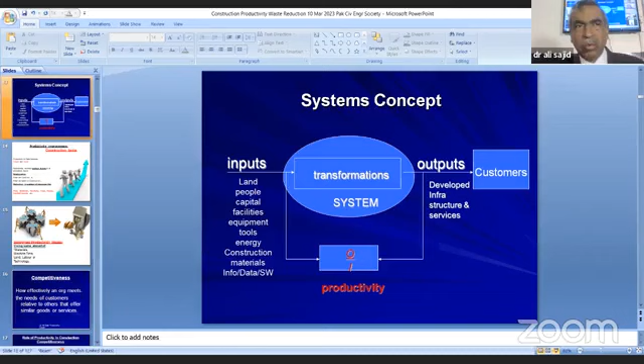The more efficient we are, the more productive we are. In countries like Pakistan or other developing nations, there is some confusion between the words productivity, efficiency, effectiveness, efficacy, capability, and production. These are six definitions which are used interchangeably even by qualified engineers, so allow me to explain them one by one in a few minutes.

Our core issue today is productivity improvement in the construction sector. As we know, productivity is a ratio between output and input with due regard to quality. If we reduce the wastage of resources like man, material, machine, time, space, capital, money, and information and data collection, then we are more efficient, and so we are more productive. Efficiency leads to productivity, effectiveness leads to productivity, and effectiveness in combination with efficiency gives you a powerful combination called productivity.

Production is the quantity of physical things being produced, I repeat, production is the quantity of physical things being produced. Productivity is a ratio of output to input, that is the product or the infrastructure we are going to carry out in construction, divided by the input given to it. Input is also design, planning, time, resources, information, data, seismic data, geotechnical data, cement, and concrete, that is input.

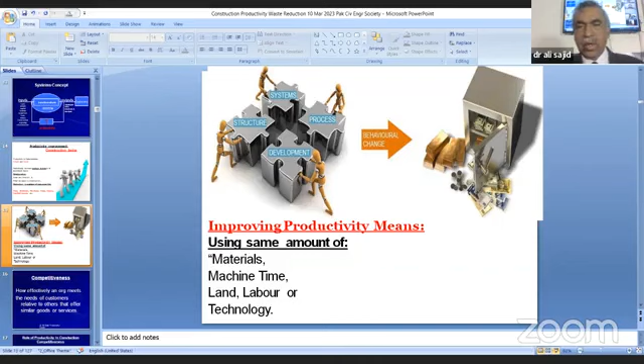So when we talk about improving productivity, it means using the same amount of material, machine, time, labor, land, and technology for producing output. This is another definition of productivity. Our construction industry is the least competitive in the globe. I have some data from India, and I have reason to believe the data in India is very close to the data in Pakistan's construction sector.

In Pakistan, I could not find any reliable data or any reliable study, and I would request through the courtesy of this forum to start conducting some study on construction productivity from today onwards, so as to get a fair idea of the pricing.

I recall one statement of a French marine specialist who came to Pakistan in the 1990s to build a submarine in Karachi for Pakistan. They told that in Pakistan we will take 3 years to assemble one submarine, which we take 1 year in France. The reason he gave was that Pakistani labor is sluggish, slow, least interested, least efficient, and least effective, and they waste a lot of time. So your productivity is 1/3 of the productivity of Europe. That was his claim. So you can well imagine the overall productivity of South Asia.

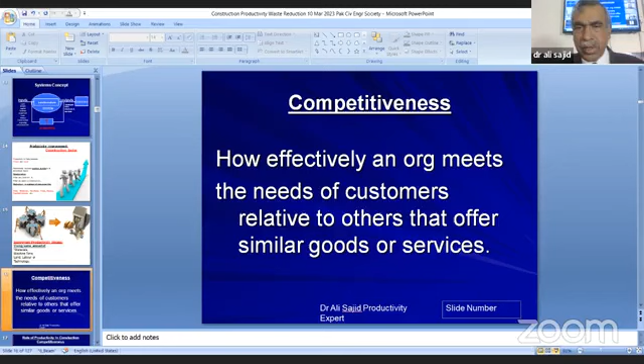Due to the culture of slavery over the last 5,000 years, speed, spark and dynamism is missing in our labor, thereby giving them lower labor productivity. So we are least competitive because our labor productivity is very low. Competitiveness by definition is nothing but the capacity of some entity to outperform another entity. That is the definition of competitiveness.

In the Global Competitiveness Index made by the Davos World Economic Forum, Pakistan is around 110, 120, 130, 2 to 5 points up and down, but below 100. And India is, I believe, 71 and so forth. So India is 30 to 40 points ahead of Pakistan in competitiveness, and productivity is the main contributory factor towards competitiveness.

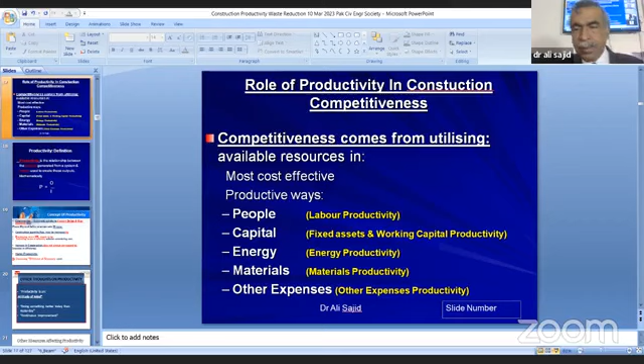So competitiveness comes from a couple of things. First of them is people, that is labor productivity. Capital, that is fixed asset plus working capital productivity. Energy, that is fuel you consume in your construction machinery, electricity, and various other energy resources like solar, etc. Then material productivity; we will be explaining them in a minute in detail.

So construction is a systematic activity to convert design and raw material into finished physical infrastructure with high value in the form of a project. Here, construction quantity numbers may be increased by a couple of things: more engagement of employees, more input by installing more machinery without considering costs.

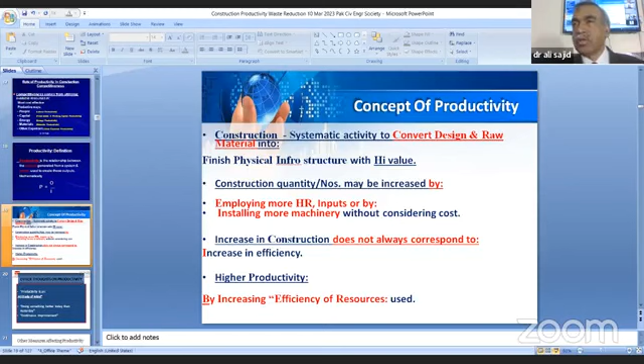So we derive the third definition, of efficiency. Efficiency is efficient utilization of input. With less labor, you produce more, that is efficiency. With less fuel, you work more, that is the efficiency of a machine. So in productivity, we use the word efficiency for the conservation of resources, that is input.

Now, we have one big claim that productivity is not only a ratio, productivity is a state of mind. It is attitude, it is your mindset. Productivity is a logical outcome of your keenness to deliver something in a speedy and effective manner. So I defined efficiency. The fourth definition now comes to effectiveness. Effectiveness is achievement of the end objective with maximum possible percentage. In Urdu, we call it Mosirpan.

So effectiveness and efficiency, when you combine both, lead to productivity. If I'm efficient, I work at a very good speed, but the final results are not coming, so I'm not effective. So efficiency in the absence of effectiveness is a useless phenomenon, we conclude. So attitude of mind says doing something better than yesterday. It is continuous improvement.

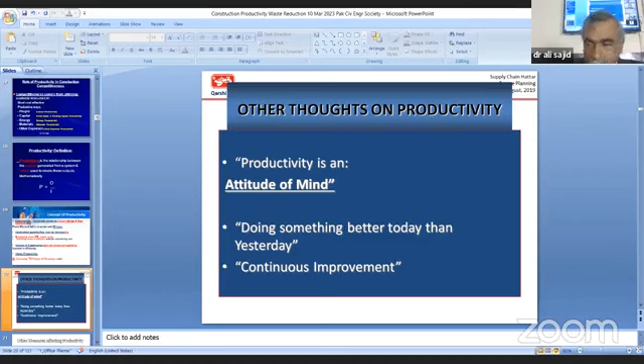So we have defined efficiency and effectiveness, and I can give you one example from my own life. I was called by a consultant in New York 15 years ago, and he asked me to come and give them 2 weeks for a project feasibility preparation in New York. I said, okay, I can come. He asked me to come within a couple of days. When I saw the passport, the visa was valid but the passport had expired. So on an urgent basis, in 24 hours, by paying maybe 100% extra money, I got a new passport. So I was efficient, because I got a passport in 1 day.

When I went to the US Embassy for stamping the visa, they said the spelling of my name was wrong. Instead of Ali Sajid, there was a typographical mistake: Ali Sajjad was printed. They asked me to bring a new passport so that they could stamp it. I was efficient but not effective. When I went back, there were some vacations by the government of Pakistan. There were some vacations by the US government.

So it took me 1 week to get the visa, and the project deadline was expired. So I was not effective. I could not reach the US in time. So efficiency in the absence of effectiveness is a useless phenomenon.

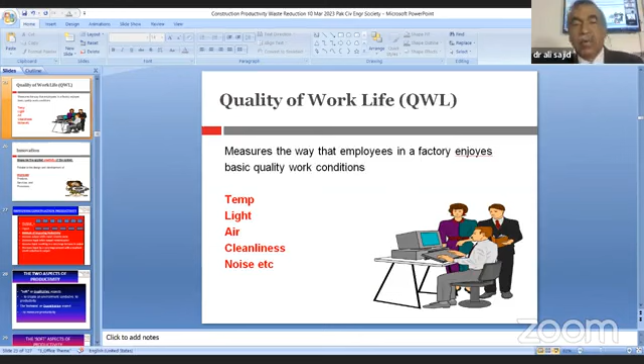This is a very important thing, which is again missing in some of our construction agencies or construction companies in Pakistan. Innovation is the fifth element, which is a logical input, or a natural input, for enhancement of productivity of construction. The element of innovation is rarely incorporated or tested or experimented in Pakistani construction,

except a few bigger companies, Habib Rafiq, and big companies in Islamabad, Lahore, and Karachi, where they use innovative techniques to enhance operational productivity of construction. The element of innovation is missing across the board in construction. So more incorporation of innovation gives rise to speed, convenience, ease of doing business, and low operational or construction cost. So these four are the logical outcome of innovation.

Try to carry out innovation or incorporate innovation in each process or sub-process of your construction system. So you need to have improved products, projects, services, and construction processes. And innovation increases the rate of construction processes manifold. I repeat my statement. Innovation increases the rate of construction processes manifold.

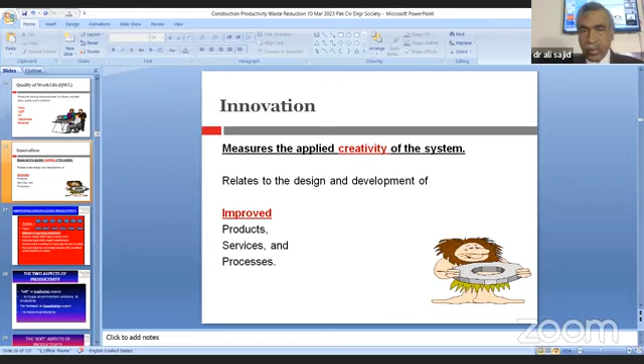Now, how to improve construction productivity? As we agreed earlier, output to input ratio is called productivity. So you can improve construction productivity by 3 or 4 means: increasing output while input remains the same, number of labor and machinery the same, but the speed of construction increases, so you improve the productivity. That is the first thing.

The second thing could be you decrease the input while output remains the same. Instead of 10 labors, you reduce to 8, and the number of finished rooms remains the same. So that is the second way of increasing construction productivity.

The third is increasing input, resulting in a very large increase in output. You go from 10 to 12, and instead of 3 rooms per week, you are making 5 rooms per week. So a substantial increase in output as opposed to a minimal increase in input. So a disproportionate increase in output relative to the increase in input also enhances construction productivity.

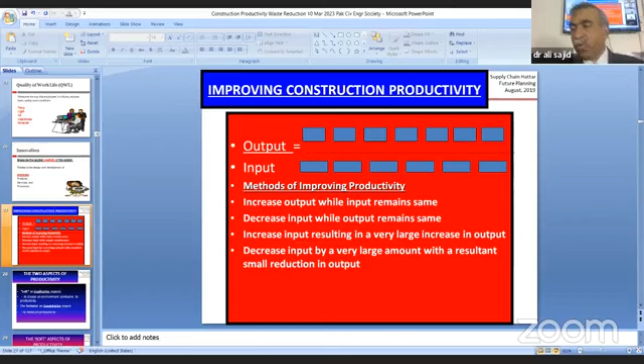And the fourth is decrease input by a very large amount. So instead of 10 labors, you decrease it to 3, and the number of constructed rooms, which were initially 3 rooms per week, now comes to 2 rooms per week, not 1 room. So that is a disproportionate decrease with a large decrease in the number of labor. So these are the 4 generic ways you can improve construction productivity.

There are 2 aspects of productivity in construction. The first is the soft or qualitative aspect. In the soft, we create an environment conducive to productivity. You try to incorporate elements of motivation, encouragement, himmat, umeed, hope, positive talk and positive communication, and elements of increasing morale should be incorporated there. That is the soft issue.

That comes from your level of leadership. That is your caliber, your thought process, exposure and education, which creates the quality culture. That is the soft aspect. And the second is the technical, quantitative aspect, to measure productivity. Productivity measurement is again one thing missing in the Pakistani construction scenario.

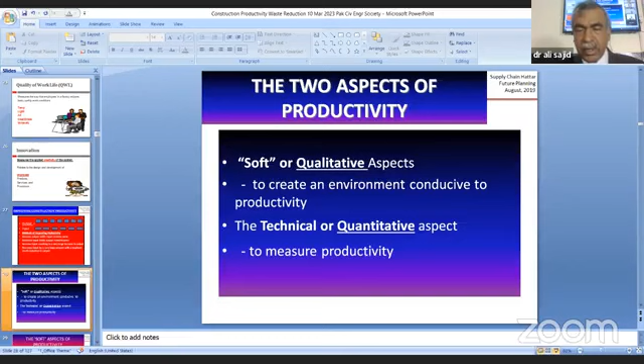And I would like to request Tahir Sultan Sahab, who is running a construction company, to consider starting to measure productivity in every process, starting from cement and concrete to formwork and bridges. Try to measure productivity of machine, labor, material, and we will try to explain in a few minutes.

The soft aspect of productivity entails productivity culture, teamwork, interdepartmental communication, level of motivation, quality of working environment, delighting the internal customer, that is your employee, work and business ethics, fairness in your public dealing, integrity of the boss, caring for the workforce, looking after their sensitivity and their self-respect, and quality of working life. These are the soft aspects of productivity, and these are also not very common in practice in

Pakistani construction companies. So my humble submission is to work on one topic on a weekly or monthly basis, and within 6 or 7 months you would be able to address the soft aspect of productivity. This is a special request to Tahir Sultan Sahab to register my points. I have seen construction companies in Washington, D.C., where I stayed for 8 years, and 1 year in Calgary and Toronto, and I have witnessed myself the quality culture, productivity culture, and construction culture of the construction companies.

We have one argument that our workforce is illiterate, dodgers and cheaters. Yet I know some companies in Pakistan that take extraordinary steps to create productivity culture. So productivity is not a ratio, it is the name of a culture, which is a logical outcome of the thought process of the big boss. So measures of productivity: partial productivity is output divided by labor, that is labor productivity. Output divided by machine is called machine productivity. Output divided by capital, capital means money or investment, the cash you spend.

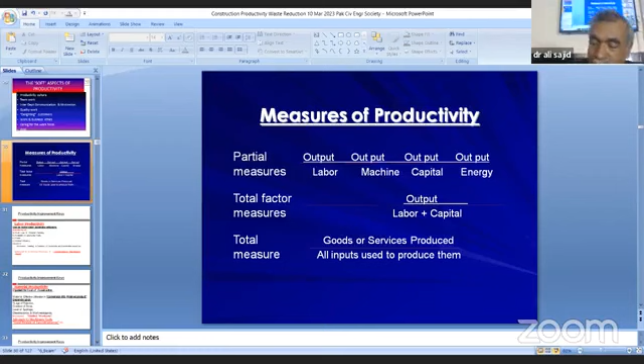So the first submission to this honorable forum is to start measuring productivity, and I can volunteer 1 or 2 days a month to any company to start measuring productivity. And I am going to give you some formulas for that. First of all, labor productivity can be higher or lower depending on a couple of factors. Availability of workload: if you don't have work, they're sitting idle, adding to negative cash flow; they are doing nothing but being paid. So reduction of workload also leads to low productivity.

Then material handling capacity of the worker and the machinery also affects labor productivity. Availability of power, that is gas, electricity, and internet is also power, and availability of software is also power. And worker efficiency, the speed of doing work, also leads to worker productivity and effectiveness. He may be efficient but not effective: he's doing the work, but at the end of the day the work is garbage. So that is non-productive again.

So worker efficiency also needs to be considered: his effectiveness, his efficacy, his capability, his willingness to work, and his motivation to work. Worker efficiency depends on his level of training, motivation, and working conditions, comfortable or poor; temperature control, humidity control, noise control all lead to worker efficiency. For the same reason, multinationals have special SOPs for worker convenience, safety and comfort, so as to add value through efficiency in the worker's mind.

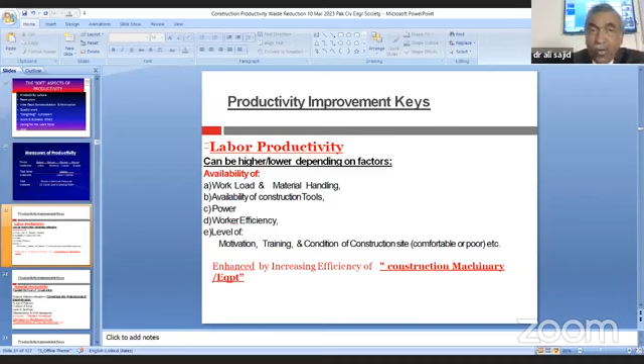Next is material productivity. In South Asia, material is becoming more important because in the last 3 or 4 months, I recall in the paper I have read, the cost of steel rose about 50 to 60%, maybe 100% in the last quarter, thereby adding extra money to the construction cost. So material productivity has a major significant role in the overall productivity of construction. So we need to find the ways and means to conserve material and avoid its wastage. Material saved is material generated, and money saved is money produced.

So material conservation depends upon percentage of rejection, creation of scrap, more waste, level of spoilage. In ordinary home construction, as a Pakistani ordinary citizen, I have observed the mason break 2 or 3 tiles and throw them out as construction waste. In 50 to 60 tiles, he uses his manual thoda, desi. He spoils 3 to 4 tiles or bricks, average of 50. So that is also waste. It costs 2 to 3 or 4% of waste.

Obsolescence and work waste, obsolete methods of construction and work waste, which I will explain at the end of the 2-hour session. The ILO, International Labour Organization, also carried out some work. I don't have time, but I will show only one slide as part of that. And I carry out one-day exercises in Sialkot and Faisalabad, in the surgical industry, footwear industry, auto industry, etc., where I give them exposure on how to save time.

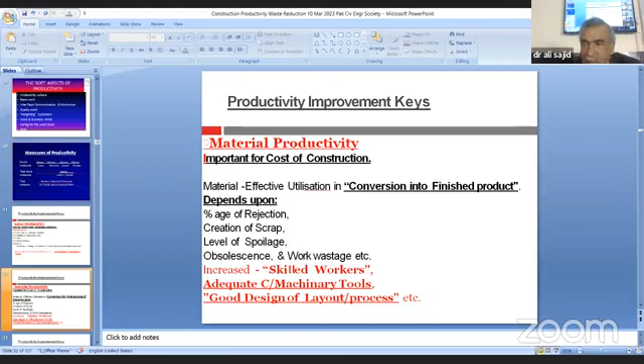So obsolescence of the work method is one thing, work wastage is the second thing, which is increased by the absence of skilled workers, adequate construction machinery, tools, etc. So incorporation of good design, layout of processes, and simplified construction processes as opposed to complicated ones plays a vital role in saving your time, resources, rework, scrap, and waste. Waste of time is also waste of money because time is money. I repeat, time is money.

Machinery productivity depends on a couple of things. First of all, availability of raw material. Raw material hoga to machinery kaam karegi. And availability of power and skilled manpower. The big bulldozers of Japanese and American companies, its worker requires 6 to 8 months, in certain cases 1 year training to be able to handle professionally, carefully, and avoiding the damages.

I recall 3 years ago, a couple of Hajis were found dead because of misuse of construction machinery in Khana Kaaba. So absence of skilled labor in construction machinery is counterproductive to the machinery use as well. That is unskilled worker. And machinery location also plays a vital role, and distance from the site also plays a vital role. So in every sentence, in every bullet, you will find one tip for your construction improvement in productivity. These are the well thought out words.

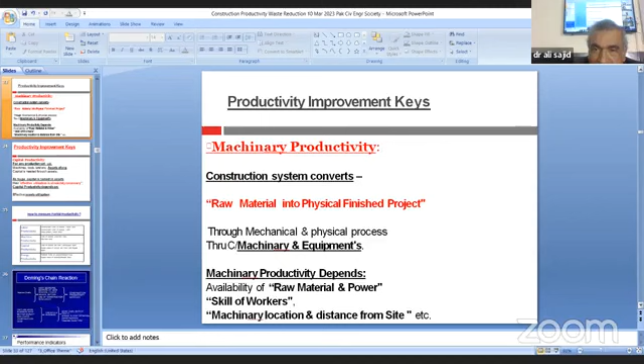And I'm giving you all slides through the courtesy of our gentleman, Dr. Engineer Tahir Sultan Saab, who is taking a lot of pain just for the sake of promotion of this

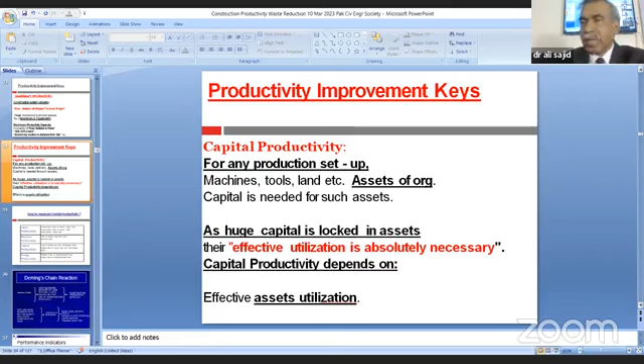Now, next question arises: how to calculate partial productivity in construction business? Unless we are able to understand the calculation processes, we are not able to improve, modify, change, innovate, or amend. So for improvement, you need to be able to understand whether you are overweight or underweight. And measurement is an essential tool to help you. You are overbooked, underbooked, or least booked.

So labor productivity, what are the units? Constructed units of output per labor hour. That is the first unit. Then constructed units of output per shift of 8 hours or maybe 9 hours. And then value added per labor hour. He tried to do something, but at the end of the day, the things were wrong and labor was not adding any value in the system. So the third performance indicator of labor productivity is labor value added per labor hour, or maybe per labor shift of 8 hours per day.

Second is machine productivity, that is construction machinery productivity, that is units of output per machine hour. And third is capital productivity, units of output per 1 lakh rupees of input. You spend 1 lakh rupees or maybe 1 million rupees in a big project, and what is the output arising from that investment you made on daily basis. So if lakh is a big amount, you may use a unit of 50,000, maybe 10,000, but that should remain consistent throughout for all calculations.

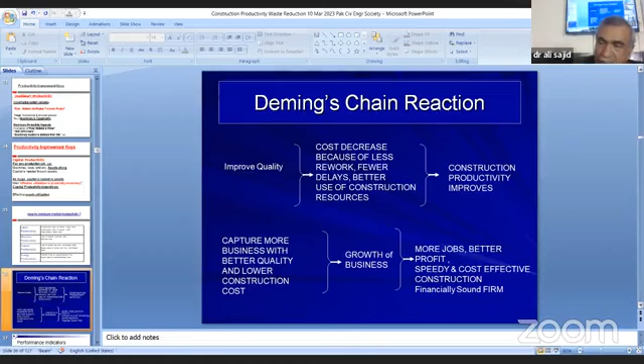In order to absorb the higher side of cement and construction material cost, that is steel, you can overcome the extra cost by reducing your waste, scrap, rework, and rejections. These are 4 or 5 things, and I'm going to explain the famous eight construction wastes, which are known across the board, across the globe.

Before that, this is the second part I'm going to explain, that is performance indicators. Now, in order to calculate productivity, you need to devise, design, and define certain level of performance indicators. These are the benchmarks we use in the construction industry, and they are based on key performance indicators. A key performance indicator provides you a basis to measure the performance of various steps, human beings, machines, or materials. Many KPIs in construction industries measure job performance.

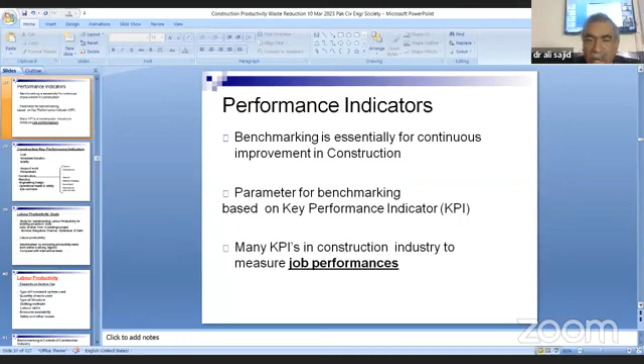Now, these are the construction key performance indicators in front of you. First is cost, then scheduled duration - 5 years, 2 months, 3 months. The quality standard is the third KPI. The fourth KPI is the scope of work, what is included and what is not included in the project. Then procurement - delay in procurement also gives a negative dent to productivity. And then construction, the main activity itself. In construction, we have 4 or 5 more parameters visible on the right-hand side.

First is labor productivity, and I will spend some time on labor productivity, giving you an explanation of an Indian labor productivity case study in comparison to the US, Japan, Saudi Arabia, and Netherlands. Labor productivity is the first subset of construction key performance indicators, in which we look at the rate of rework, material wastage, and whether equipment activities are at the planned rate or not. The concept of earned value also comes here.

After construction, the sixth parameter of KPIs is planning, then engineering design, then operational health and safety, and the role, activity, performance, and quality assurance at the subcontractor level.

I was told that some federal government big construction companies were awarded contracts, and at times they subcontract 80 to 90% of the work, making money because of their big name. This is not a healthy practice - to subcontract 90% of your project and take the cream. Rather, remain engaged in the productivity and quality efforts yourself.

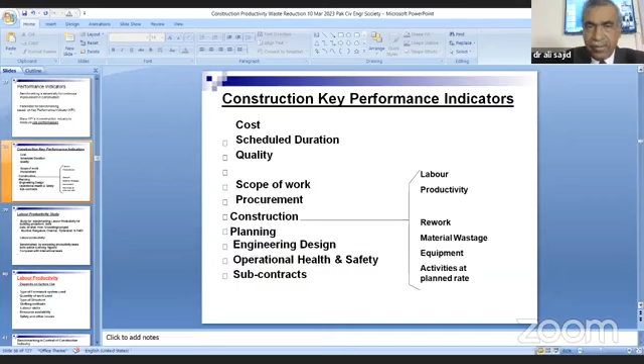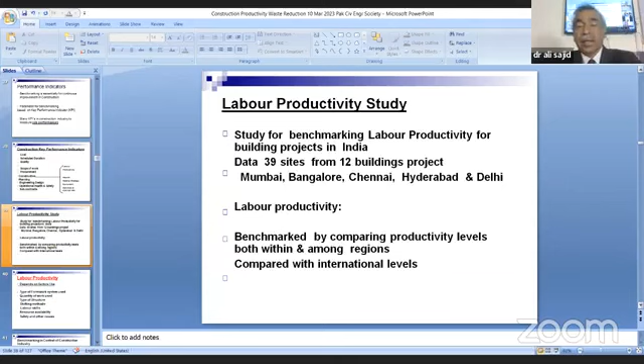Now, one labor productivity study was carried out in India a few years ago. Data of 39 sites was collected out of 12 building projects in Bombay - new name Mumbai. Since I am old, Bombay comes naturally to me. Bombay, Bangalore, Chennai - old name I believe Madras, but I don't know if it's a new name - Hyderabad, and then Delhi. In these 5 cities, they collected data from 39 sites and tried to calculate labor productivity.

Now, labor productivity typically depends upon a couple of factors in South Asian culture, especially the type of formwork system used, quantity of work, type of structure, shifting methods, labor skills, resource availability, safety, and other issues. These are the dependent variables of labor productivity.

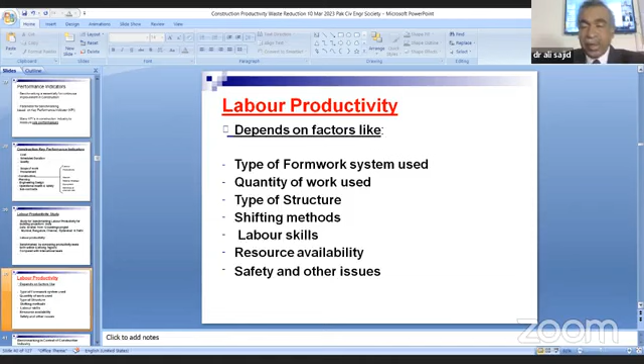After defining these labor productivity factors, the study entails cost consisting of 4 activities. First is concreting, second is formwork, third is masonry - which in Urdu is called raj mazdoori - and fourth is reinforcement. Being a civil engineer, you are aware of all these categories, so I will not take time to explain.

The first part is concreting. So the concreting productivity in various regions of India - across all 5 big cities - the unit is cubic meter per man day. In Mumbai, they produce 2.97 cubic meters per man day. In Delhi, it was 4 times less, at 0.49. The mean throughout India was found to be 1.22 cubic meters per man day.

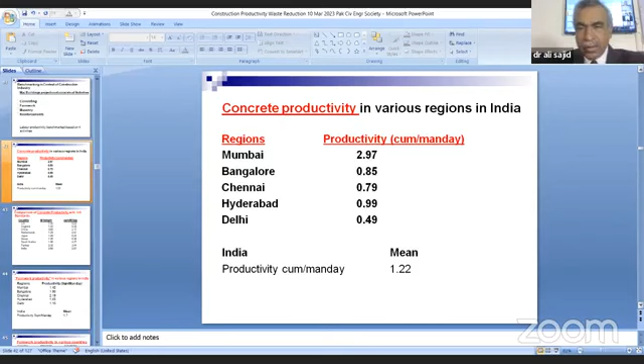That was the finding of concrete productivity in India. I am very positive the Pakistani figure will be closer, maybe lesser, maybe to some extent higher, a few percentage points around this mean of 1.22 for concrete productivity. This is the finding of a rare, unique case study. Next is a comparison of concrete productivity with international standards.

In USA, the man hour per cubic meter required is 1 man hour per cubic meter. In India, it was 2.69 man hours required to produce 1 cubic meter of concrete. That is almost 2.5 times more. In China, it is 3.6 times more. In Netherlands, it is very close, 1.24. And in Korea, it is also close to Netherlands, 1.26.

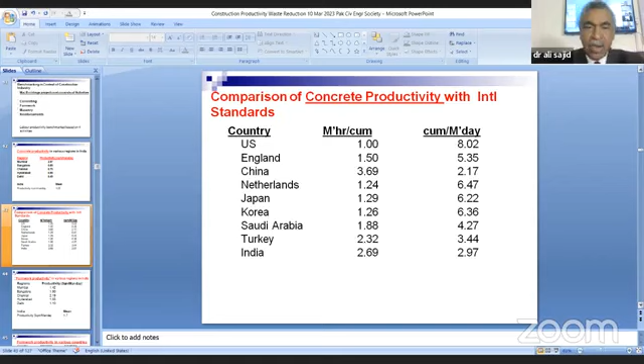I don't know the figure for Pakistan, but the Society of Civil Engineers can carry out these kinds of studies for benchmarking and comparison. This is food for thought for all of us.

So that is the first part, concrete productivity. Second part is formwork productivity in various regions of India. The mean here we found was 1.7 square meter per man day for formwork productivity in India. I am very hopeful, but not sure, that for Pakistan it should be between 1.5 to 1.7 square meter per man day productivity of formwork.

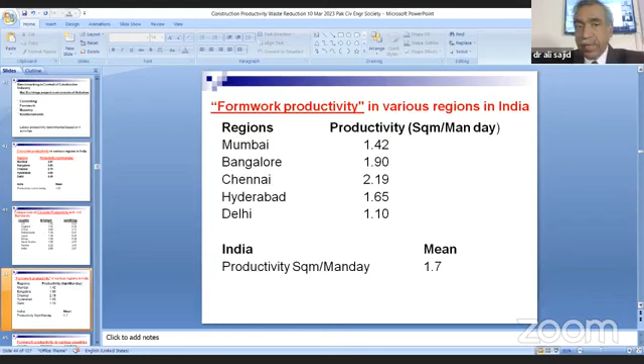Then formwork productivity across the globe, this comparison gives a clear picture. Man hour required for making 1 square meter in USA is 0.8 man hour. Whereas in India, to produce the same quantity, we need 4.71 man hour for 1 square meter. That is almost 6 times more. That shows the sluggishness of formwork productivity in South Asian culture.

I'm again pretty hopeful Pakistani man hour per square meter could be 4.1, 4.5, maybe 4.8 in that region, provided we work on that. But hardly any study was carried out, and I'm not sure it is current.

The second part of this comparison is square meter per man day, how much square meter they produce in one 8-hour shift. In India, it is 1.7 square meter they produce on a construction site, and in USA it is more than 10 times, 9 times, 8 times.

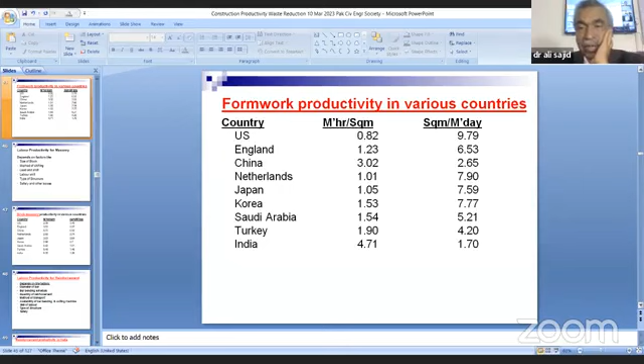So formwork productivity in USA is 7 to 8 times more compared to India, and maybe 8 times more in Pakistan when we compare to USA. This is the reason they make blocks and buildings in weeks and we make them in months. In Japan, it is 7.59, and in Turkey it is low. India is slowest and lowest. China is again 2.65, although Chinese are very fast and efficient. And England is 6.53 square meter per day.

That also shows the sluggishness of South Asian culture, slow speed, desi style - 'dekhi jayegi, Allah malik hai, khair hogi, jaldi kya hai, aag to nahi lagti' - this is the kind of mindset that sits in their minds. Because of that, our laborers in South Asia have the same psyche, from Bombay till Khyber, they have the same psyche. This is my assumption, it might be wrong, you can challenge it.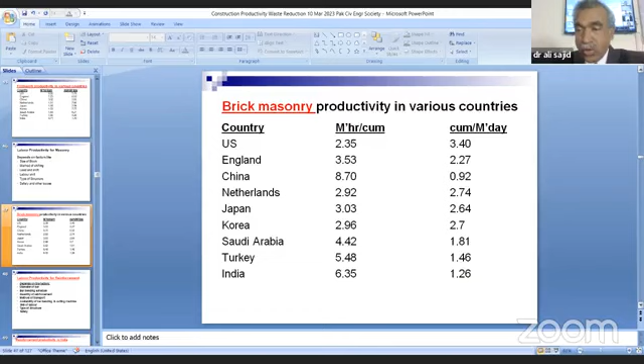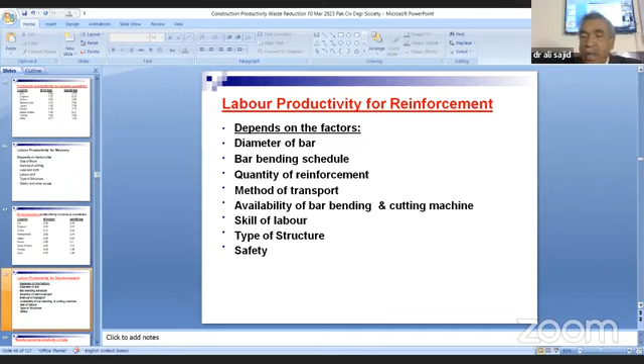China's brick work is slower, and they are trying to overcome it through use of technology. Labor productivity for reinforcement, the 4th part of the study, depends on factors: diameter of bar bending schedule, quantity of reinforcement, method of transport, availability of bar bending and cutting machines, skill of labor, type of structure, and safety. That is the labor productivity of reinforcement, the 4th part of the construction productivity survey in India, and the finding was an average of 90.5 kilogram reinforcement per man day was carried out in India. Now see the international practices.

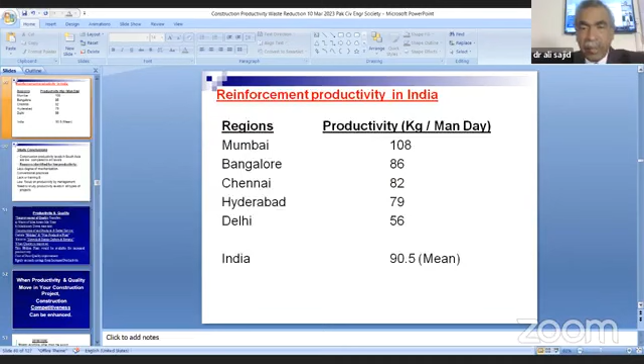International practices are not available here. A study concluded that construction productivity levels in South Asia are low compared to international levels, 4 to 5 times lower in certain cases.

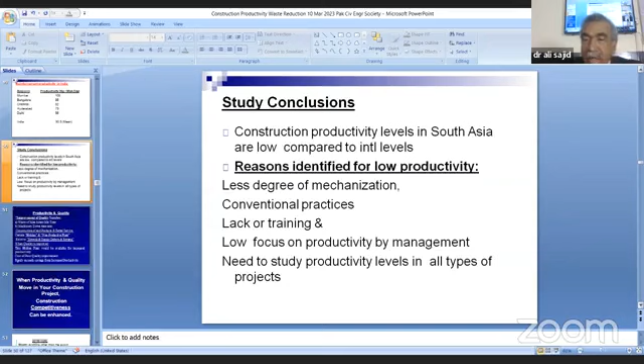If you add the productivity level to 100%, 200%, the cost of construction also decreases substantially. So we need to study productivity levels in all types of projects. This only pertains to building projects, not highways, bridges, high-rise buildings, skyscrapers, and dams. There's a dire need to carry out study of these kinds of systems and processes.

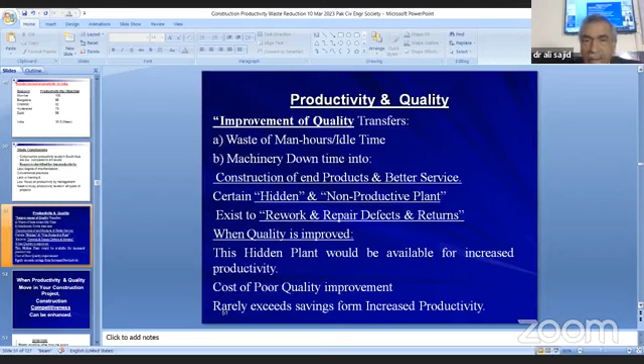When productivity and quality improve in your construction project, construction competitiveness can be enhanced. Pakistani construction projects face multiple challenges, and one of the biggest after inflation is low level of construction productivity, which entails four categories, similar to what I mentioned in the Indian study, very close to the Pakistani construction environment.

Now I will mention the famous 8 or 9 manufacturing or construction wastes, which are very common, relevant, and prevalent in Pakistani or South Asian construction projects.

Before I start the second part, the main part, allow me to define what waste is. Waste is anything other than the exact amount of equipment, material, parts, space, or worker effort that is absolutely essential to add value to a product, project, or construction activity.

So anything which is not adding value to the construction activity, and which the customer does not want or is not willing to pay for, is a non-value added activity. So I try to define the second term, non-value added activity.

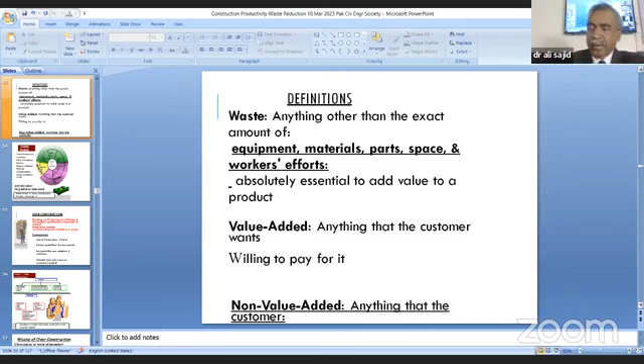As a civil engineer, your core job is to identify, calculate, measure, and eliminate non-value added activities from your construction activities, series, services, or processes. Non-value added activities are anything that the customer does not want and is not willing to pay for, and that does not substantially add any productive value to the system or process.

Now we come to deadly waste. There are 8 types of deadly waste. First of them is over construction. I will spend some time to define and review them.

Second is excessive inventory in the warehouse, such as construction spare parts, construction machinery spare parts, raw material, etc. That is the inventory. Third is extra processing.

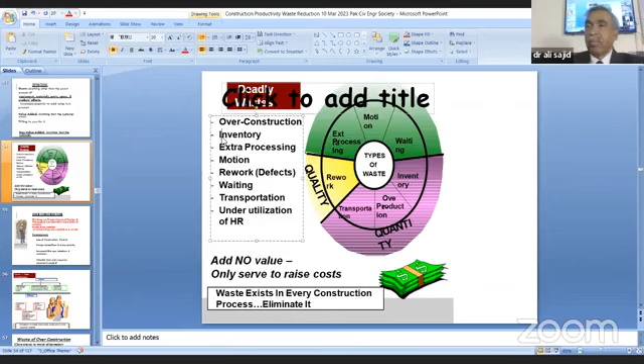You borrow or rent some machinery that is not being used, yet you are paying its rent daily, weekly, or monthly. Similarly, you hire geotechnical engineers, paying them maybe 5 lakhs per month, but the project hasn't been awarded yet, so you're paying them extra money. So underutilization of qualified technical engineers is also wastage of HR.

We will try to explain each one by one with good examples so you can correlate with your construction activities. First is over construction -- working on a project beyond design, premature construction more than needed, or as people say, 'pehle khich do bhai' -- that is over construction.

It is not part of your contract, not part of your final scope of work, yet you carry it out by mistake or for other reasons such as overbilling. So over construction is the first productivity loss or waste in the construction business.

What are the consequences of over construction? First is loss of construction control -- when you over construct or overproduce, you are likely to lose control on the construction site.

The second consequence is that fixing rejects or poor quality becomes a low priority, since you have a lot of rejects, it becomes the norm. Third is increased mix-up, mistakes, and confusion.

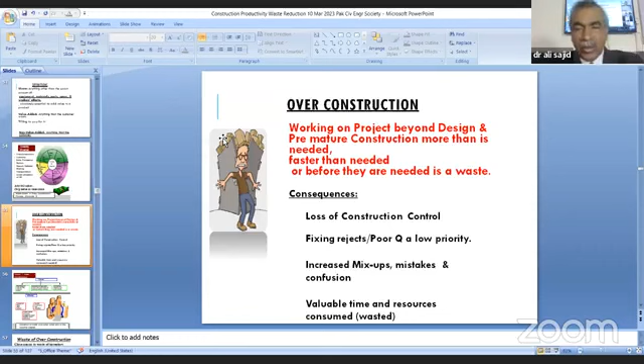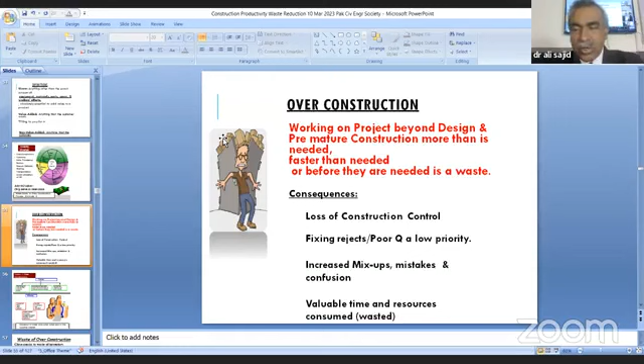When you add extra work which is not required by the contract, you are likely to cause more mistakes, confusion, and chaos in the system. The last consequence of over construction, which hampers productivity, is that valuable time and resources are consumed and wasted.

So the first thing I try to highlight is to avoid over construction beyond the call of contractual obligation. That's the first thing. This is a further explanation of over construction -- its causes include working on the wrong priority work.

Priority 2 or priority 3 started instead of priority 1. That is one cause. Constructing more than the customer or next processes need: next processes need till X, and you are adding X plus 10 or X plus 15, which is not required. That 15% extra is wastage.

Third is creating reports no one reads. You keep on adding extra reports and generating volumes of work output in paper. Hardly anybody reads. This is a symbolic representation of over construction. What are the negative effects and impact on the construction? First, on the left-hand side, you see on the slide, take up floor and disk space.

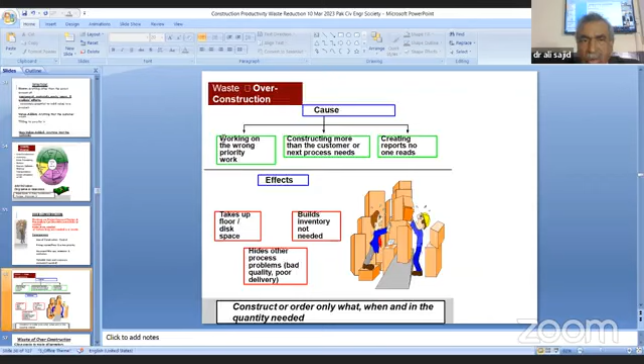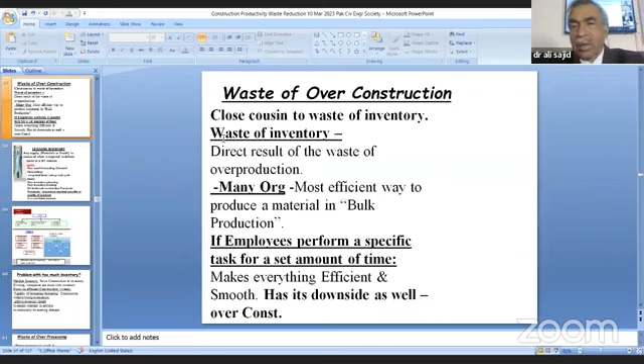Remedy is... needed. This is the remedy to avoid the over construction. So waste of over construction also entails one fact, that it is very close to waste of inventory. When you over construct, cement and steel, excessive quantities are being used, which are otherwise required for important priority technical contractual work, thereby hampering your availability of cash flow in your hand. So waste of inventory is also one logical consequence of over construction.

Third is excessive inventory. You foresee that steel is likely to increase from 2 lakh per ton to 4 lakh per ton in 6 months. So you buy an extra 100,000 tons in your warehouse and block your money in anticipation of getting one contract, and you are not awarded the contract, and you are without contract for a couple of months. Hundreds of millions of rupees are stuck in the excessive inventory in the form of unused steel bars.

So any supply of material goods in excess of what is required to deliver projects in a just-in-time manner is excessive. What are the causes of excessive inventory? First is poor need forecast. Second is long lead time, setup and cycle time. Cycle time is the time from when you set up the stuff to when the final product came up. The third is poor inventory planning. Because of that, you hold extraordinarily large inventory which is likely to finish its shelf life.

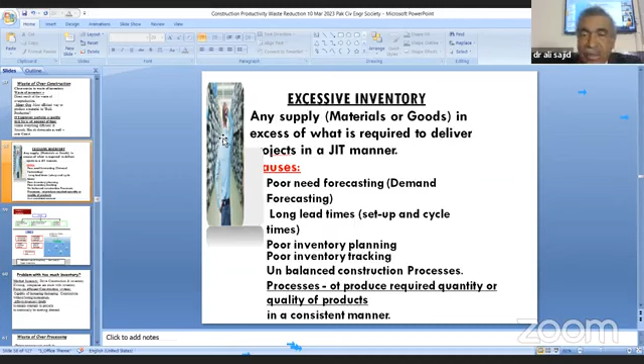And then poor inventory tracking. That is also one cause. Unbalanced construction processes: the process of production requires quantity or quality of products in a consistent manner. So you are not able to properly map out your processes and generate forecasting. That is one of the main reasons for excessive inventory in your construction warehouse. So this picture depicts the broad causes.

Lots of inventory in store racks and floor. Useless email in the inbox, like excessive inventory. Effects: difficulty in finding material. Need extra resources to manage. You need extra manpower to manage them, extra shelter to keep them, and you are paying extra rent to keep them in various kinds of stores. Takes valuable space; you are paying the rent. Losses due to damage: in rainy season, cement becomes stone because of extra moisture in the air. So that is loss due to damages.

And obsolescence. Material becomes obsolete because of changing customer demands. You are using them and they want other styles. So what is the solution? Solution is efficient use of inventory, not just-in-case inventory. Just in case, you are at risk; you may or may not get things on time in Pakistan. So make efficient use of inventory.

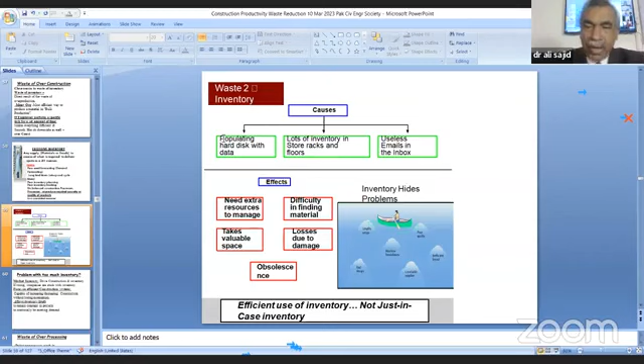Then the next type of construction loss is waste of overprocessing. Overprocessing is a very common phenomenon in South Asian culture: overdoing for the sake of pleasing the customer when he or she does not want it. So overprocessing is another kind of waste. Doing unnecessary work in construction of projects, products or material, using too much raw material and ending up with unnecessary scrap. Wasting human or machine time with inefficient processes.

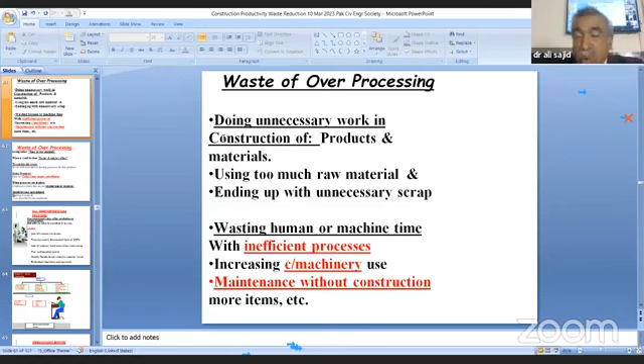Increasing construction machinery use where it is not needed. Maintenance without need. So these are all kinds of overprocessing. This is further explanation of overprocessing: losing either time or raw material. When it could be done fast or with less effort, overprocessing requires you to pay extra money, resources, material, machines, and HR to carry it out, and that is sheer wastage of resources.

So make processes easy to understand, simple, and efficient. That is the first answer to the problem. When processes are in place, employees ensure they are not wasting time or resources; it should become internalized, making it easier. For overprocessing, I would suggest one rule: try to make your process simpler, easier, lean, efficient, smart, and smooth. That is the solution for avoiding overprocessing.

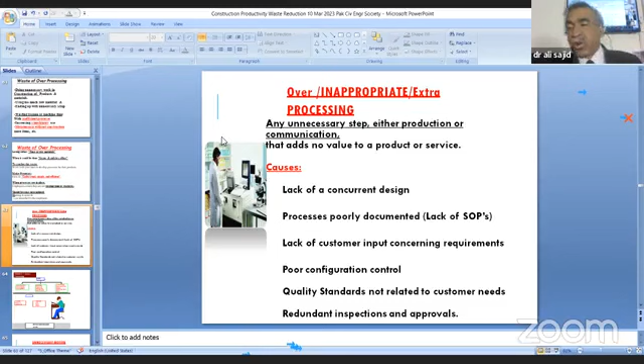the customer needs. Instead of a 10:1 ratio of cement to sand, you are using 20:1, for example. Maybe 5:10, maybe 5:1. That is overprocessing or inappropriate processing. Redundant inspection and approval. A lot of persons are required for approval and counter approval, thereby wasting a lot of time. That is overprocessing.

This is the depiction in the form of a picture. Causes: multiple ways of doing the same task, rechecking, non-standardization of the project or processes. And its outcome is opportunity for more defects, and it creates delay in delivering. These are the two logical outcomes of extra processing which causes delay. So what is the solution? Eliminate excess work. At the bottom it is written, eliminate excess work.

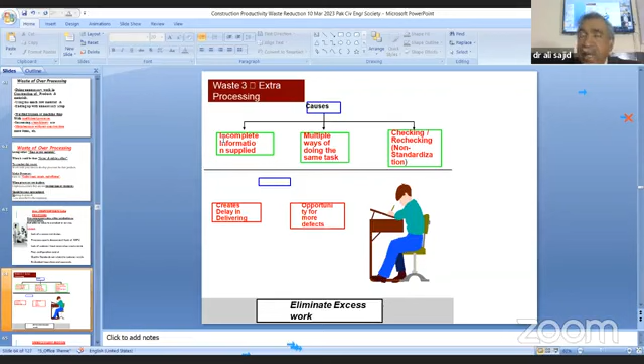Fourth important thing, the famous construction waste which hinders your productivity of construction, that is unnecessary motion. Take one example of a wedding party in a big villa where food is being made 500 or maybe 600 meters away from the main serving room where people want to consume the food. So that unnecessary motion of bringing the food from the kitchen to the people may cause delay. So try to address the issue of unnecessary motion.

And what are the reasons? Reasons could be ineffective layouts, equipment, office and plant and site layout, lack of visual control, poor processes, poor documentation, poor construction place organization. The construction site is not properly laid out and things are moved in a haphazard way, in crisscross fashion as opposed to series fashion.

I can give you one good example of the benefit of control of unnecessary motion in the Ford Motor Company in the 1920s. Henry Ford was the inventor and owner of the Ford Motor Company, which was named after his own name. In the early part of the century, the various components being assembled were taken from point A to point B manually by hand. So parts were static and people were moving. A lot of time is wasted in unnecessary motion.

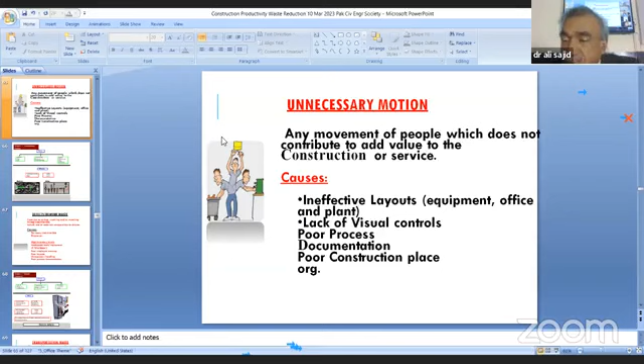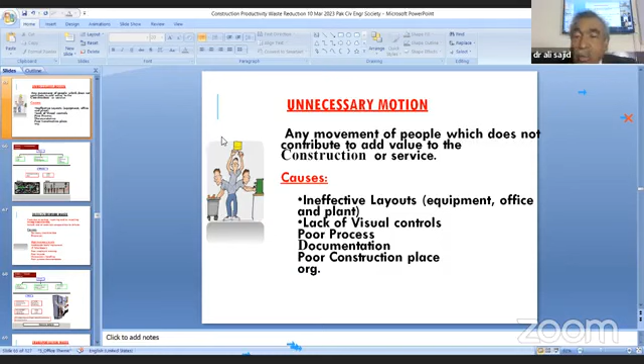We conclude therefore, I repeat my statement, enhanced productivity in construction leads to expansion in your business activity manifold, not 10, 20%. In a couple of years, your company could be the leading company because of efficient, effective and smooth processes, defined SOPs and avoidance of these 6 or 7 kinds of waste which I'm mentioning here today.

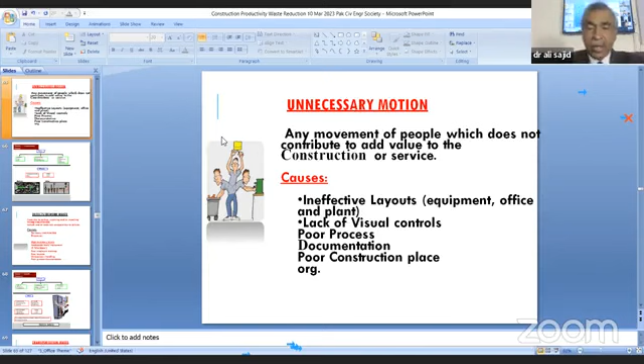So this is the physical demonstration or pictorial view of unnecessary motion. The example I gave you was from Henry Ford. One more example I can give you is Suzuki made in Pakistan and Maruti made in India. Both are originally from Suzuki company, Japan. They have given the license in India with the name of Maruti and in Pakistan with Suzuki.

The manufacturing cost of Suzuki made in Pakistan is almost twice that of India because of more productivity in India. Their production cost is half of the Pakistani cost. And there was one study carried out in 1984-86 in Pakistan by the Mechanical Engineering Department, UET Lahore.

The cost of Suzuki made in Pakistan is more than Suzuki made and assembled in Japan, because although Japanese labor is 20 times more expensive than labor in Pakistan, their processes are so efficient, so smooth, and the losses are so minimal that they are cheaper than Suzuki made in Pakistan. It's the real life drama.

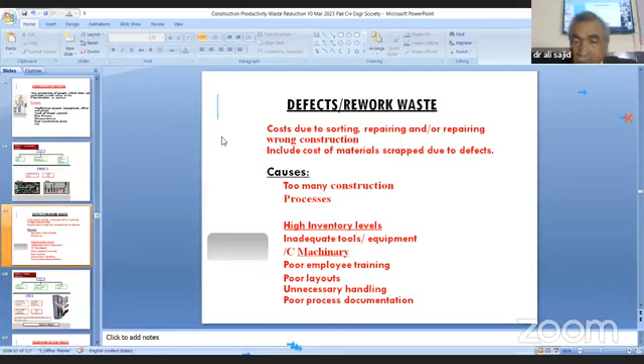And these are again very common causes. Too many construction processes is one cause. High inventory level could be a second cause. Inadequate tools, equipment, construction machinery, which results in more damage, more scrap, and more rework. And the main thing in rework waste is poor employee training, poor layout, unnecessary handling, and poor process documentation, lack of SOPs. People are not clear what to do, when to do, where to do, and how to do. These are the main reasons of rework waste.

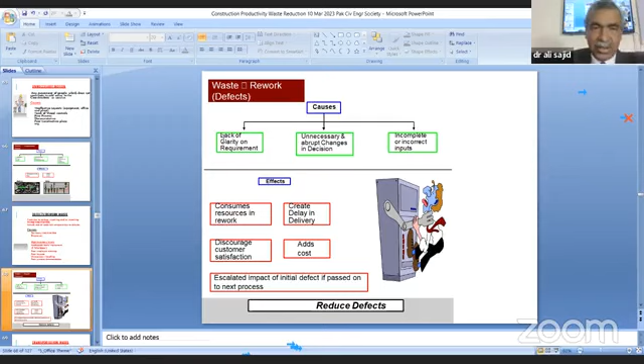So what is the solution? Reduce defects and save money, save time, save resources, and save scrap and material. All those saves. So this I have already explained.

Then the 6th type is waste of transportation. Unnecessary motion is within the construction processes from point A to point B, and waste transportation could be from site A to site B. Cement or concrete is mixed at point A and brought by truck to the final destination where it is to be placed, in the brick making or the final stage of delivery.

These things may be in your notice, but I'm trying to focus on them in a collective, comprehensive, more consistent and persistent way.

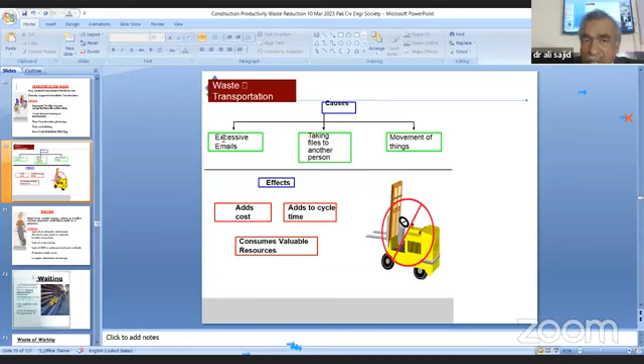Second last waste is waste of waiting. Labor is sitting and construction work is not being carried out. That waiting time is loss of productivity. Machine is not working and labor is waiting. Why is the machine not working? Because there is no fuel, there is no electricity, there is no software engineer available to reprogram its internal software. So people are waiting.

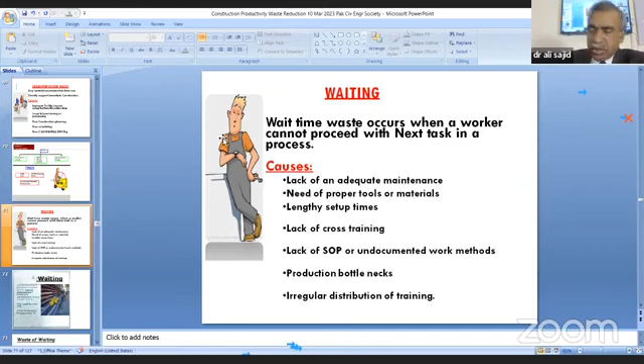So that is production bottlenecks. And the last one is irregular distribution of training. You train certain people and you have not trained the other people. So that mismatch also causes confusion. You have trained workforce and you have untrained workforce. And they quarrel and create fuss and battles and fights, thereby disturbing the construction process to a great extent. That is a waiting time philosophy.

Customers who place orders for construction are late because of waiting time. So what are the consequences of wait time waste? Personnel that cost, doing nothing, adding no value; you had to pay their salary for that day. So budget becomes overrun. Construction is not being undertaken, but your price goes up because of labor cost. And they are being paid for time in which they are not adding any value, or construction work is not being carried out. So that is loss of productivity, loss of capital, loss of investment, and loss of money. So that is the first consequence of wait time waste.

Delays that lead to overtime to conclude. And you are required to pay overtime 50% extra compared to fixed time. That also spoils your budget. That is the second reason. And the third is caused due to inefficient process that exceeds the standard cost. Inefficient methods or processes which are impeding the smooth flow of construction work are slowing down the construction processes, thereby adding more labor cost. That is the third waste.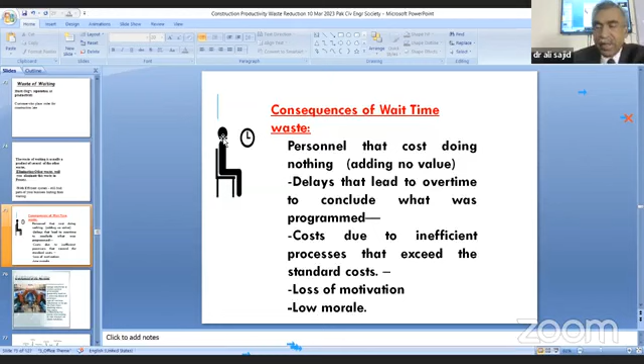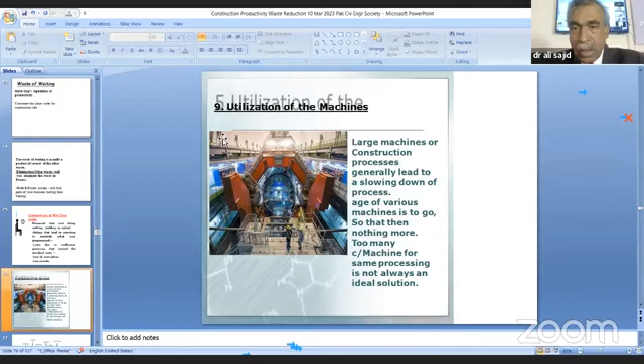Next is utilization of the machines. In today's construction, 30 to 70% machinery is being used from design to delivery, planning to finally meeting the deadlines. And those 30 to 70% use of machinery, when it is underutilized, also causes negative impact on the overall productivity of the construction. So this is 7th, maybe 8th reason.

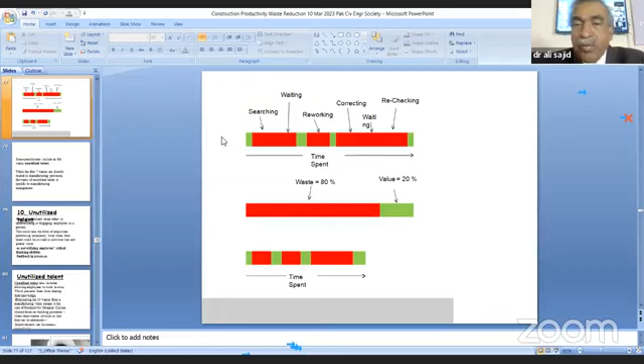This is one diagram which shows total time spent: rechecking, waiting time, correcting time, reworking time, searching time, and this is waste time up till 80% in construction or manufacturing in developing countries. And total value added time at times is not more than 20%. So try to minimize reworking, correcting, waiting, searching, and rechecking as per SOP and define its standard cycle time, so as to compare whether you are late or on time. So this is one depiction of machine utilization.

Then is unutilized talent. High-tech professionals are sitting in the offices, doing nothing, looking busy, not adding any value and getting paid to the tune of millions of rupees per month. That is underutilization of talent. That is also common in public sector in developing countries like Pakistan or India, that they are wasting their talent.

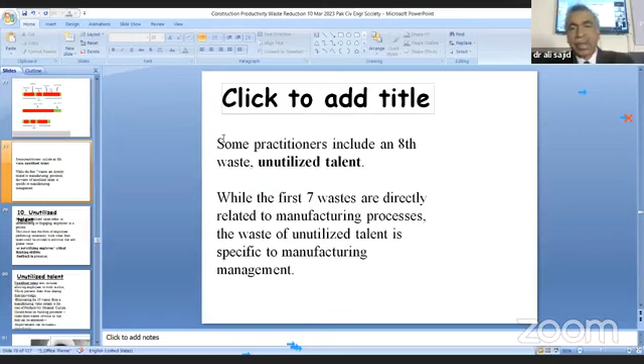A high-tech geotechnical engineer, or an engineer who is required to carry out a survey or review findings of seismic data from the earth, or a soil chemistry expert, is sitting idle because his part is not started yet, thereby making him underutilized or unutilized. So that is one thing which should be avoided in construction because it kills productivity. This I just mentioned, underutilized talent.

Then long coffee breaks. I am very concerned not to mention religion here. Yet on the social side, religious side, long breaks, coffee breaks, gossip breaks, socialization breaks, and performance of religious duties by any religion take a lot of office time, typically 60 to 70 minutes in a 9-hour shift. Try to minimize, try to standardize these long coffee breaks.

These are the few construction wastes I just mentioned. Some of them are in your notice, but the core issue is how to identify, how to quantify, how to overcome, and how to reduce those wastes. As we keep on working, it will take 6 months to 1 year to reduce these 8 construction losses. When you reduce those wastes or losses to 5 to 3%, you are likely to produce 30 to 40% profit because of avoidance of those wastes.

And as I just mentioned, wastes are in 3 categories: white collar waste, which is the waste of engineers, procurement specialist, planning engineer, procurement engineer, design engineer. That is white collar waste. Their sluggishness, their slow response, 'dekhi jayegi' approach, 'jaldi kya hai' approach. These are the typical impediments of white collar waste, which is very common in South Asian culture. They are not meeting the deadlines, thereby delaying the project as a whole. I'm talking about

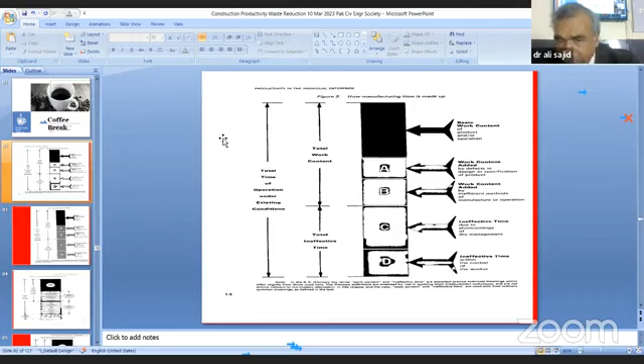That is category D. If you try to identify all of A, B, C, and D, and work on that - which may require maybe 2 months each on every aspect - you are likely to make your construction process, project, or system more efficient, more effective, more user-friendly, and more productive.

Remember, productivity is a function of efficiency and effectiveness. Efficiency pertains to resource utilization, and effectiveness pertains to the achievement of end objectives - whether the building is ready on time.

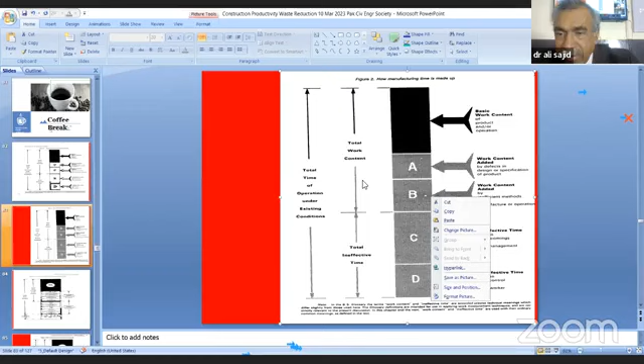That is the last slide, which deals with the overall picture. This is total time on the left hand side - total time of operations or construction - divided into total work content and total ineffective time. Ineffective time is C and D, which is in the control of management and the control of the worker.

This is in your hands, and this 10-15% is in your hands. 30% management and labor can make effective. And A and B are work content added by design defects, or added by inefficient methods.

Improve the method, the way Henry Ford did in 1910, 1920. He made the assembly process super efficient, gained 100% productivity, and reduced the cost of cars below the market price, only because of the productivity of the efficient method. So you can also follow the Henry Ford model, and can reduce your construction cost to a substantial level.

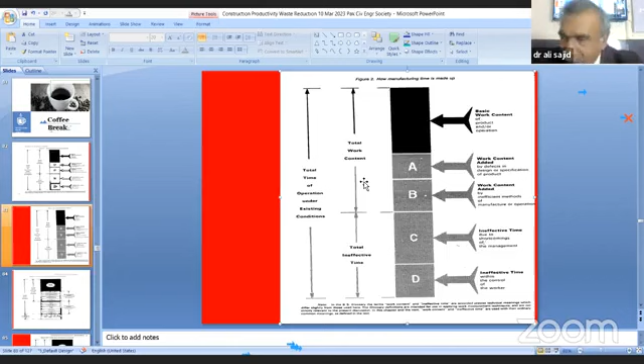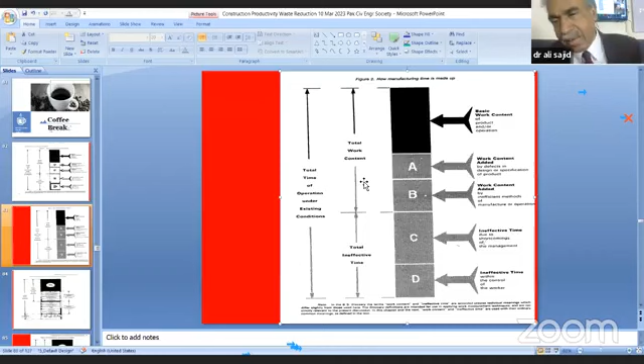I can volunteer as a professor, an ordinary exposed Pakistani, to any volunteer company to carry out an experiment on construction productivity before 6 months and after 6 months, or before 1 year and after 1 year, while addressing factors A, B, C, D. C and D are within your hands, while A or B require intellectual value addition: machines, methods, software, CNC machines, construction machines, bulldozers, heavy machines. So with that, I finish my agenda.

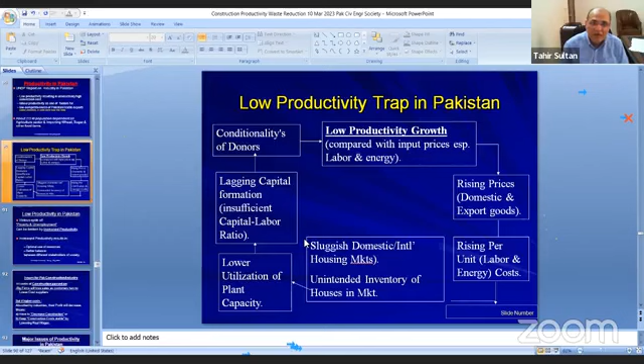Under me, there were 6 nationalities from Southeast Asia: Pakistan, Bangladesh, Nepal, Philippines, Sri Lanka, and others. My experience was that the productivity of Pakistani labor, you might be surprised, was much better than the other nationalities. And not only Pakistani—among the Indians, I had North Indians and South Indians, and believe me, the productivity of North Indians and Pakistanis there in Saudi Arabia was almost similar, maybe marginally different.

Good. And one last thing—as compared to, let's say, Filipinos or Koreans, we were less consistent, but definitely North Indians and Pakistanis were better than them. If you want to comment on it, it's okay. Yes, Thais and Filipinos are relatively less hardworking compared to South Asian and Chinese.

There's no difference in this. Genetically, at the international level, when we go to the global scenario, we are more productive, but within the country, we are less productive. This is my observation—I stayed 9 years across the globe, in different cities and countries. So this is my observation.

Okay then, thank you, Doctor. We have one comment from Rizwan Mirza also. Let me read it for you, Doctor. Go ahead.

Lack of enforcement of intellectual property rights—is it an impediment? Yes, to a great extent. Intellectual property right is hardly being implemented, though we have the laws and a proper IPO office, but enforcement is very weak. Although it does not directly affect labor productivity, it affects the image and professional norms of the organization, especially if we are using unlicensed, highly expensive software for seismic data analysis, geotechnical analysis, soil analysis, water analysis, and so forth. Intellectual property right violation is very common in South Asia. So I would not comment on the law enforcement part, but it's the job of the federal government to ensure that.